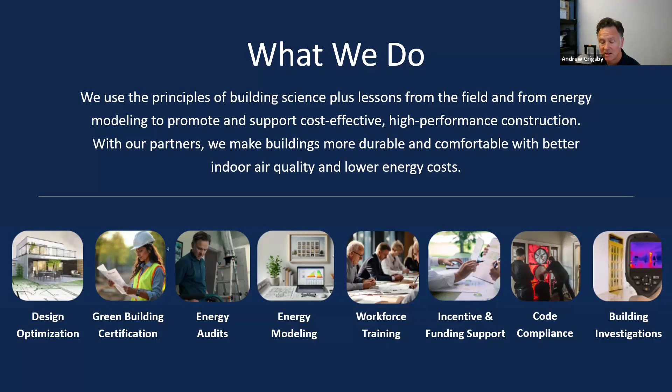To me, it's just about building better housing that costs less to operate, that's more comfortable, that's more durable, that manages moisture, has better indoor air quality. So that's really what all this is about for us.

This content has been developed really as a partnership with lots of y'all in the room, building code officials, some partners at DHCD, and grant funding that originally was funneled through SEEA, an organization down in Georgia, and originally it was Federal Department of Energy funding. So we appreciate that, and we're glad for that support so that we can do these sorts of trainings.

So we're going to jump into an overview of what we've picked out as sort of the most notable energy code changes. And again, this is residential. We're in an hour's time. This is going to be quick, and we're just hitting the residential energy code changes. We're going to follow that with sort of a quick look at how the code overlaps a little bit with some of the incentives that are available for building more energy efficient homes. And again, we'll end up with your questions.

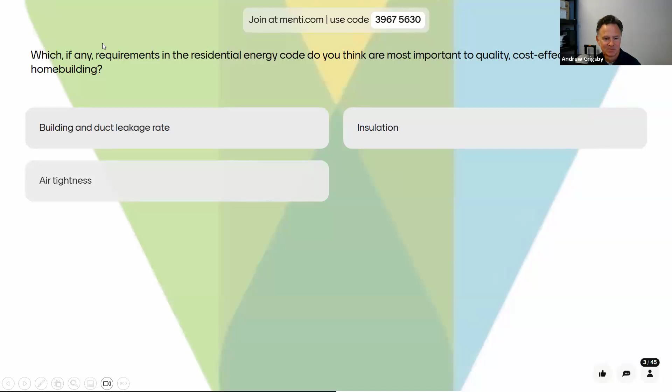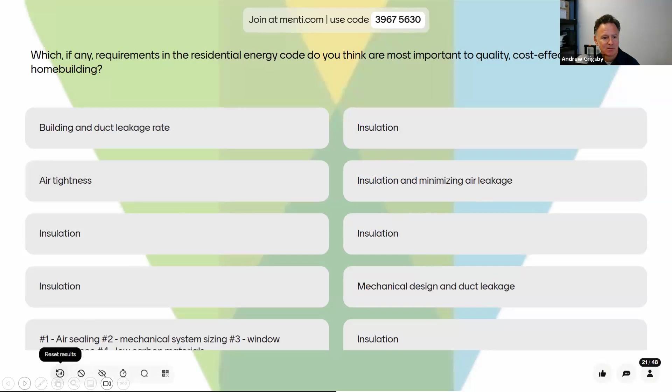Okay, insulation's making a strong showing here. It's sort of the basics, what people think. Ooh. Okay, people calling out air sealing, mechanical system sizing. That's a good one. Window performance, leakage rates for, I guess, the whole home, and for duct leakage, air tightness. All right, these are great responses. Thank you. I'm going to move on here.

All right, so jumping into the meat of the presentation. First, a slide I often start most anything related to home energy use with: where does the energy go? Because to me, it's just sort of a grounding in what's relevant. And this is data from the U.S. Department of Energy's pretty exhaustive study in 2020, and it's for Virginia. Often I show a national average, and I'm happy to have Virginia data here. It's not very granular, as you can see. Other is a big bucket, and a big chunk of that is appliances, plug loads. So many of the devices we're plugging in these days.

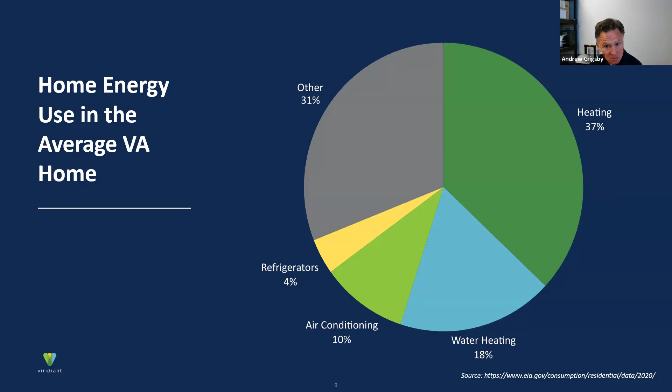But still, the biggest one is heating. That's where most of our energy goes. And if you add heating at 37% to air conditioning at 10%, heating and cooling count for just under half of all the energy use in our homes. And in as much as the energy code speaks primarily to heating and cooling costs by way of air sealing, insulation, duct sealing, mechanical performance, this is really getting to at least half of folks' home energy bills. So this matters to people. This is what's important to us, because we think we're out there to really reduce the cost of housing, and we think energy efficiency is a real pathway to that.

All right, so what's changed with the 2021 code? Well, to me, one of the big things is that Virginia is no longer all 4A climate zone. We now have 3 climate zones, and we'll go through that. One of the issues related to that is the R60 attic insulation that's now required in zones 4A and 5A for some flat attic floors. Slab insulation, for years it's been 2 feet in length, and now it's 4 feet, and that to me is a significant change. There's a new requirement about maintaining loose fill attic insulation at the edges of walls inside attics. I've got a picture to explain where that shows up. The details on floor insulation, number 5 there. Nothing's fundamentally changed, but there's some helpful specificity in the code about how to ensure performance.

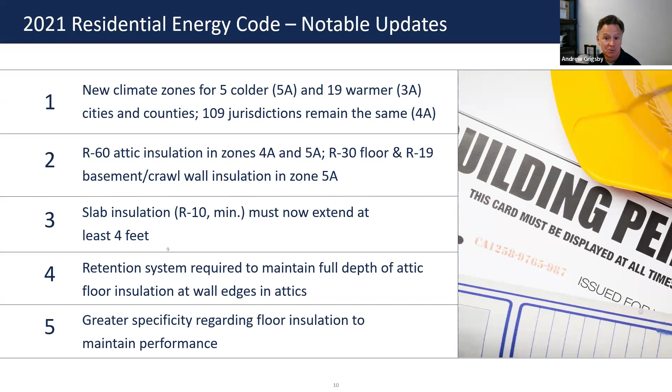We've got more requirements for insulation and air sealing. I mean, it's all basic stuff, but there's a big table in the energy code that calls out where you must air seal, and that table continues to expand. Duct leakage, this is kind of big. All duct systems will have to be tested, and even those that are fully within conditioned space will have to be tested, and they can't leak more than 8%. Ducts outside of conditioned space remain at 4% maximum leakage.

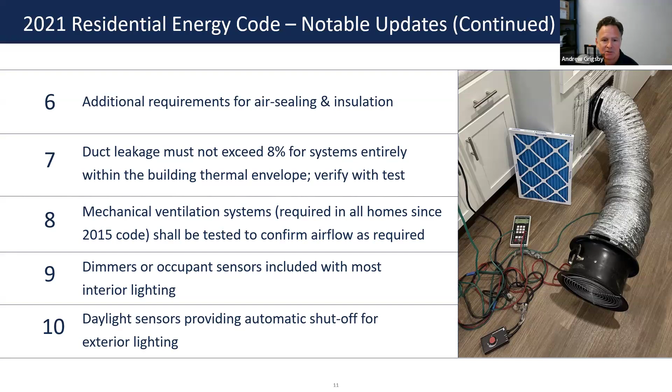Number 8, mechanical ventilation. The whole home mechanical ventilation system, you'll have to test it to see how much air actually moves through that system. We can't just put it in and assume it's moving enough air to provide the required amount of fresh air for the folks. So that's a change. 9 and 10 both speak to lighting and including sensors on both interior and exterior lighting.

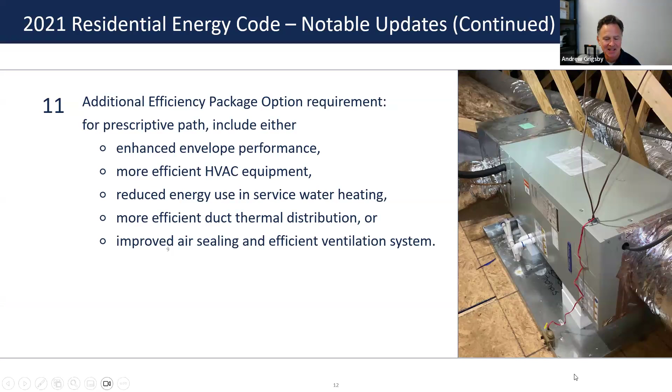And finally, number 11 here, it's a bit of an oddball. If you're following the prescriptive path, and the requirements for performance pathways as well, but for most folks who use the prescriptive path, you have to do everything that's required, and then you have to do one more thing. You get to choose between these 5 here. So it's kind of a strange option in the code to my thinking, but we'll try and unpack it, and I'll be interested in your thoughts on it as well. All right, so that's a quick overview. Now we're going to talk about these in depth.

Climate zones. So these climate zones, just so folks know, they come from ASHRAE, the American Society of Heating, Refrigeration, and Air Conditioning Engineers, and they track weather in every county in the country very closely because they are being relied upon by heating and cooling contractors to give them the right data for set points and for sizing equipment and for understanding the heating and cooling load of buildings. So they're just trying to produce accurate data about the weather that's actually happening.

And so what we see is there is a lot more of the state that is now in that 3A zone that used to be just all below us in North Carolina. Really from Danville to Williamsburg and Virginia Beach, that whole southern tier there is going to be a warmer climate zone. And then up in Bath, Alleghany, and Highland counties, the three green ones in the inset there, and the cities of, I think, Covington and Clifton Forge. Those are the 5 jurisdictions that will now be this 5A cool, humid climate zone.

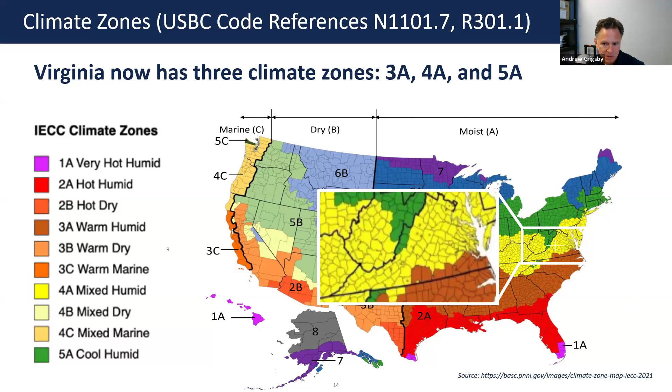And what that does is, if you're familiar with this table from the Energy Code, in your jurisdiction or for local officials, you can just look in one spot. For builders, architects, etc., you'll have to double check a little bit if you're building in a new place. If it's Norfolk versus Richmond, those are now 2 different climate zones.

What we see as far as changes over here on the left side, that column, the window U factors, and again, U factor is just the mathematical inverse of R value, so it's thermal performance. Those go down to get greater thermal performance. It's still a double pane window that corresponds to a little better than R3. So those are all a little better across the climate zones.

And here's the one that people are talking about, that R60, which, as many folks know, in the 2024 model code has gone back down to 49. This tracks what's in the 2021 model code, the IECC, for these climate zones, and that changes again, but downward, which is unusual in the new edition, the 2024 edition of the model code.

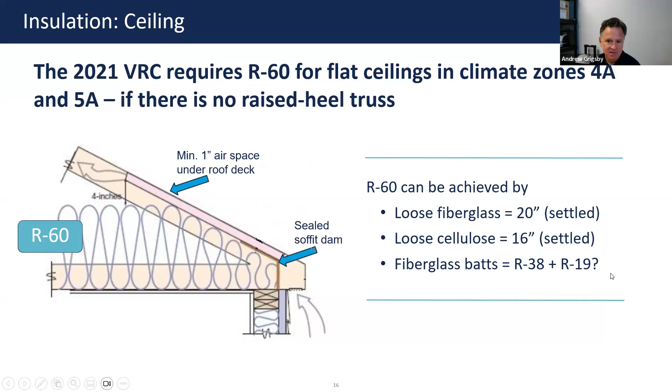So a bit on that R60. That applies when you're insulating a ceiling, when you have probably a vented attic, and you have your rafter or truss design such that there's not room for the full height of the insulation out to the outer edge of the top plate of the wall below. If that is the case, then R60 is what is required over the main field. There are a variety of ways to do that. Fiberglass, cellulose, but this is the current requirement.

If you're using a raised heel truss, an energy truss that allows for R49, around 12 inches height here at the outer edge of the top plate, then it's still R49 for zones 5A and 4A, and down in those 3A climate zone jurisdictions, it'll be R38. So again, it depends. We've got a lot of the state now that says 3A climate zone, big population centers in Hampton Roads, and all the way across the line with North Carolina over to Danville. So just know where you're building.

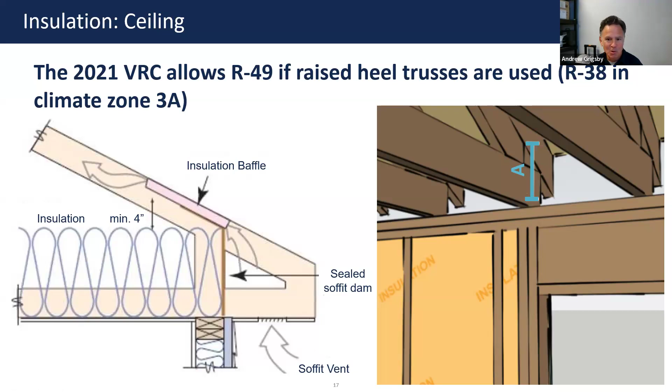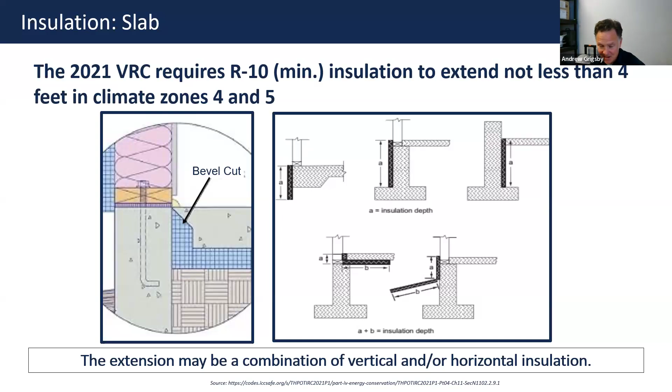We had an in-person version of this training here in our office yesterday, and we allowed more time for that. So there was lots of discussion about this one too, as well as that R60. Just slab insulation in general, the conditions when people don't want to do it, how much energy flows through solid concrete, and how much you want to insulate slabs as much as possible. But the nuts and bolts of providing that 4 feet in the field is going to be something that designers have to factor in, and then inspectors have to look for.

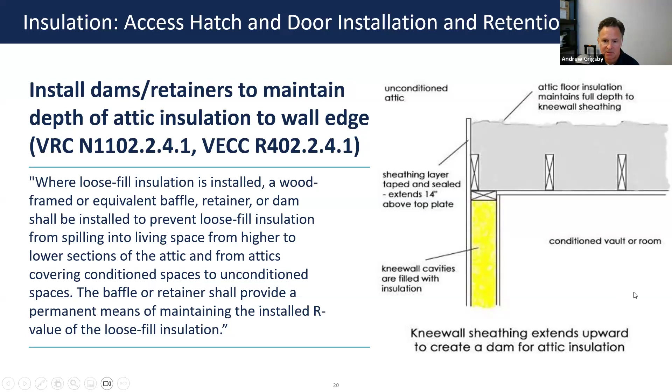All right. I'm really missing the discussion here. I wish we could talk about this stuff, but I'm flying through the slides. Then we'll have time to talk about these.

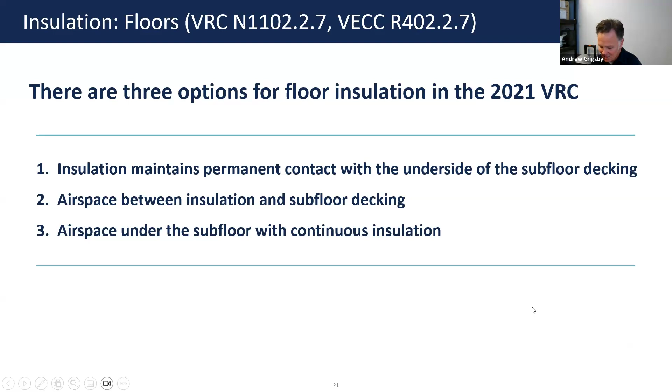All right, floor insulation. As I read it, well, maybe things have... I'm sure there's people on this call who could tell me the particular details that changed, but I think the spirit of it hasn't changed much. But there are these 3 options detailed in the code. Option number 1 speaks, to my mind, to how most floors are insulated. And here we're talking about maybe the floor over a vented crawl space, the floor over a garage where you have finished space above a garage, or maybe the floor of some sort of cantilever or bump out.

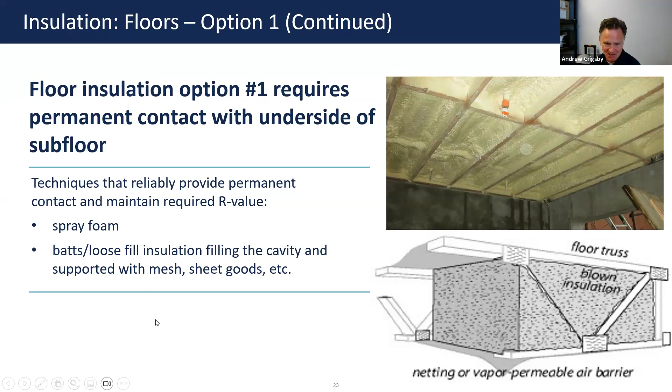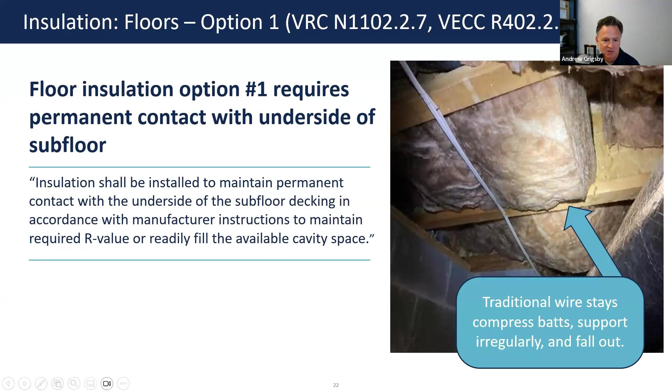Again, we had a lot of discussion about this yesterday, but that basic language, permanent contact, in accordance with manufacturer instructions, that's not new. That's the way it's been. I'm just taking the opportunity to call out what I think is a defect in what is a very conventional application for floor insulation. So that was option 1.

Option 2 specifically allows an airspace, but in order to do so, you have to essentially make that cavity airtight. You have to have the proper R value of the insulation that's below the airspace and in contact with some sort of solid barrier below. And then the other key detail is that at the perimeter where those air cavities abut a band board, a rim joist, those joists will have to be sealed to make sure these cavities will be airtight. If we're going to leave that airspace in there, we're going to make sure there's no air movement through it. And here, the entire required R value is cavity insulation.

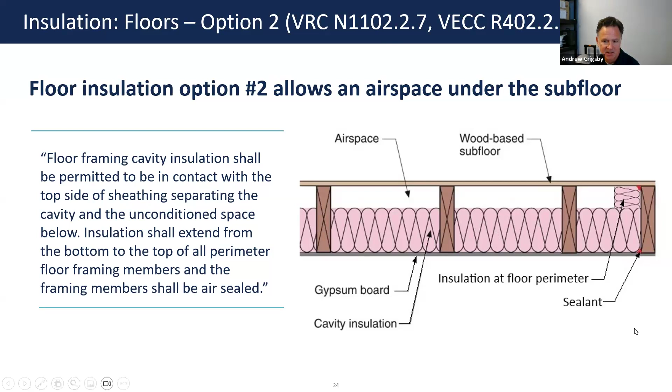All right, moving on to air sealing. And here there's this table in 1102.4.1.1 in the VRC. A lot of it's pretty common sense stuff to my mind. And as a builder, you'll want to air seal as much as possible anyway, because you know you've got to pass the blower door test. I just called out a few things in parentheses there. There's just a few new details that I thought worth calling out.

In particular, even as I read it, even with a vented crawl, one will have to air seal the butt joints of the rim board and seal the rim board to the sill plate. I think a lot of folks are very used to gluing down subfloors, so that sealant on top of the rim joist is not going to be new for most people. But then also sealing butt joints, such as shown here in this corner, between the rim joist members, and also sealing the sill plate to the rim joist, that's probably going to be new.

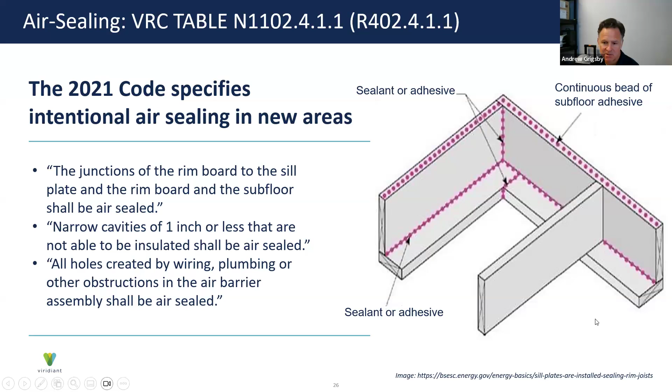And in this drawing, they also show sealing the butt joint in the sill plates, which I didn't see as required in the code, but if you're there, you might as well. And what this does is it reduces air movement through that layer of the building that is encompassed by those floor joists and rim joists. So again, there's a lot of new text in that table that's called out both where and how and why you'll have to air seal. So it's worth taking a look at.

Here's a slide which we had a lot of discussion about yesterday, and it made me dig deeper on it just this morning. And turns out it's not new text at all. I thought it was interesting, so I included it in the slideshow earlier. But that is the same text going back to the 2015 Energy Conservation Code. We had a lot of conversation about this last fall at the VBCOA conference, where some folks in the room responded to it as I did, like it was new, but it is old.

The main language here is the language from the code in parentheses. And what I take from that is you want to make the building substantially airtight at the sheathing layer. And to me, that's just good building science. We want to keep outside air out of those cavities that typically are insulated. So it's good building science.

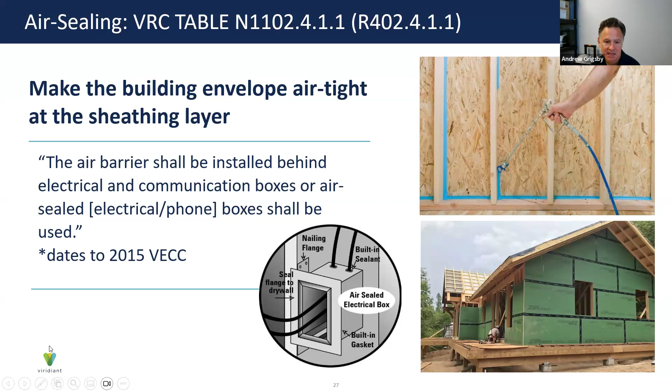And indeed, the conversation at the VBCOA annual convention last fall was about the cost of these air sealed electrical boxes, which are $6, $7, $8 a piece. No one wanted to put those in. So the solution is to do what's smart and make the envelope as airtight as possible at the sheathing layer. Variety of ways to do that: tape, foaming or sealing on the inside. But again, this is not new. It goes back to the 2015 code.

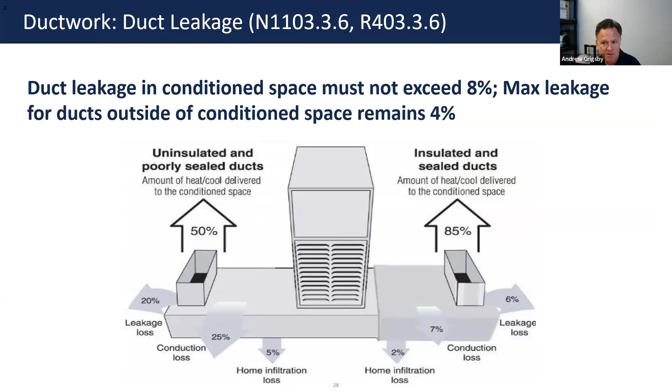Moving on to duct leakage. And here, this is new. Any ductwork that's in conditioned space: previously, if it was all in conditioned space, you didn't have to test the ductwork. Now you do, and it may not exceed 8% leakage. For folks who are really in the weeds on this, that is total leakage, not leakage to outside. So 8% total leakage for ducts that are in conditioned space. For ductwork outside, it stays the same, 4% is still the maximum.

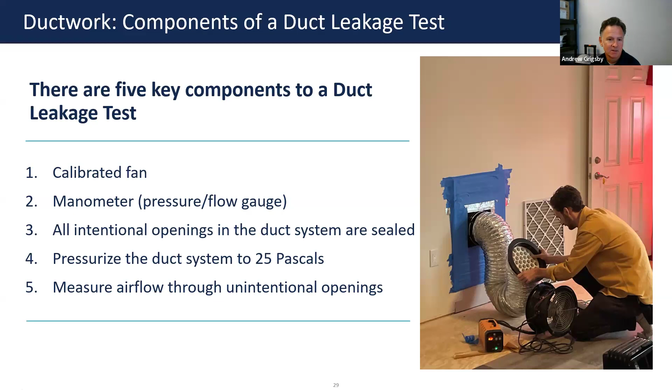If you're not familiar with the duct test, it's a pretty simple thing. We seal off the duct system, we seal over all the registers, and then we pressurize the system and measure the excess air going through it. Doesn't take long. We get really critical data about the performance of the building.

And a point to why this is so critical. These data are from the so-called field study that Viridiant participated in. We were the contractor for Virginia for this effort that took place across many southern states and was extended to other states, where it was meant to be an investigation of not just what code is on the books, but how homes are actually showing up on the market. So at random, best we could, we went out across the Commonwealth to try to get to homes that were presumed meeting code and ready for occupancy.

And what we found, even after that first incidence of Virginia requiring ducts to be tested. Now, prior to this, going back to the 2012 code, and I think even the 09, there was a maximum leakage rate for ducts that were outside of conditioned space, but we didn't require actual testing of them. We allowed visual inspection to confirm leakage rate. Well, once we actually required a test and then went out to see how compliance was doing, results were pretty bad. We found that most homes, even when they were presented as being ready and code compliant, most of them were not. Some of them were failing at 20, 30, the worst one we found was over 40% leakage.

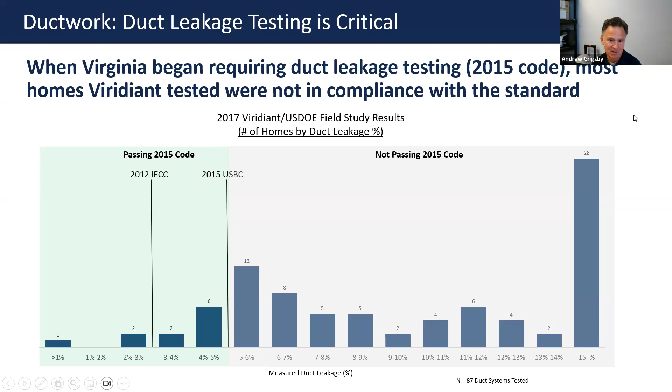All right, moving on to a different kind of duct, the duct that is connected to your whole home ventilation system. And here's a slide showing a version of the problem: when exhaust ducting is long and twisted and maybe stepped on or damaged or something else is sitting on it, it's real hard for air to move through it.

And our mechanical ventilation systems, which have been required in Virginia homes since the 2015 code, are required because we're building homes to be more airtight. And as we do to improve cost effectiveness and efficiency, we get to a threshold where we also have to have a mechanical ventilation system. And on balance, this is cost effective for residents. But we have to make sure that those ventilation systems are performing, that they are moving the amount of air that code stipulates. So that volume of air is unchanged. We're still using the same table that is based on bedrooms and square footage, and we're still using the same formula as an alternative to that table.

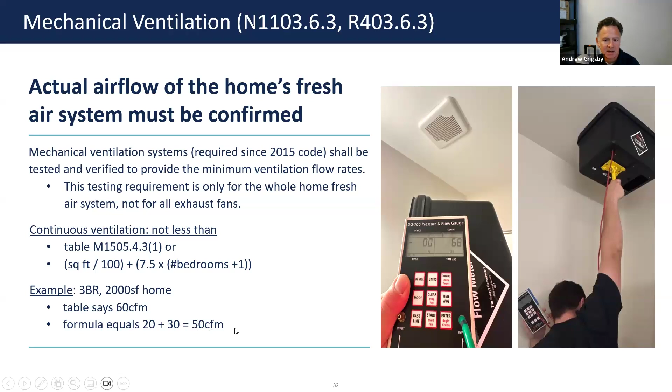Real quickly on ventilation, there are a variety of code compliant ways to meet the ventilation requirement. One is via exhaust fans. Going back one slide here, say we have this home where the table says 60, the formula says 50; maybe they opt for the lower number. You can use either one of these as you choose. So we have to move not fewer than 50 cubic feet per minute continuous exhaust from that home. So we can do it by having a fan that exhausts 50 CFMs continuously.

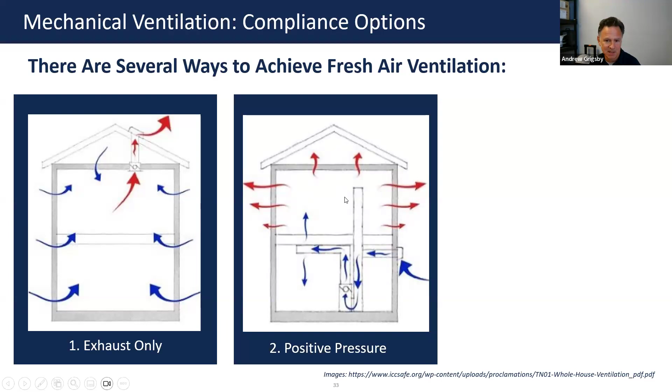We have a so-called positive pressure system, where we're basically inflating the home and driving that air out through random leaks and cracks. And finally, we have balanced, where we are using fans to both bring air in and exhaust the same amount of air. So we're not intentionally driving outside air through the building envelope, or inside air to the exterior. This is preferred for lots of reasons, but the equipment to make it happen is more expensive.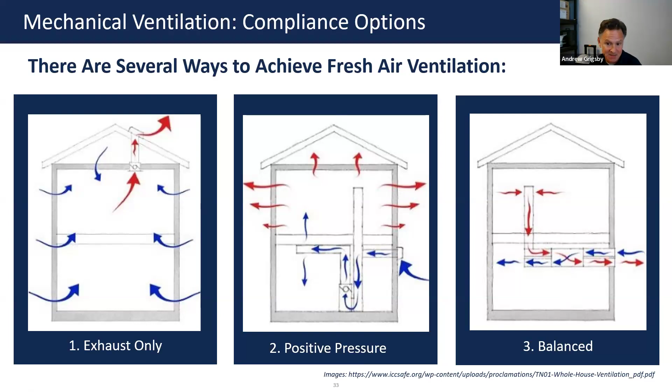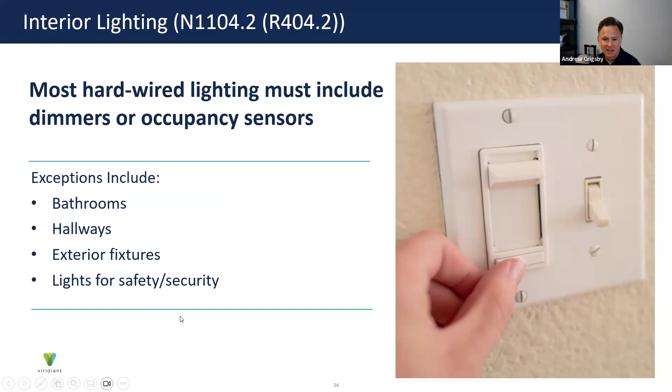All right, we're up to number 9 here, 9 out of 11. A lot more dimmers and occupancy sensors are going to be required in all homes. There are some exceptions listed there, but a lot more rheostats coming your way. Similarly, on exterior lighting, if it's more than 30 watts, some sort of controller to ensure it's not going when it doesn't need to go. And so we can basically save folks a little bit on their electric bill.

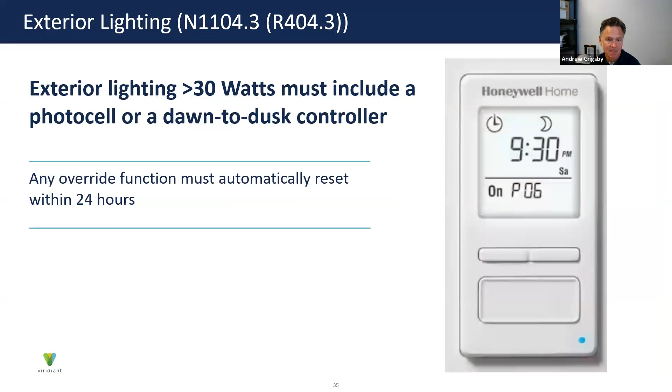All right, last but not least, the additional energy efficiency requirement. So here I'm talking about the prescriptive path of compliance with the energy code. The next slide will cover the so-called performance pathways for the energy code, and they're different, but they relate to each other. And again, everything I've talked about thus far has been with that prescriptive path, where there are minimum R values, where we're not using an energy model to calculate whole building energy efficiency.

So for the prescriptive path, we've done all those things we've talked about. We've got the R60 if necessary. We've tested the ductwork even in conditioned space. You do all that, then you have the option to choose among one of these other 5 measures to further increase the energy efficiency of the home.

Now, I would encourage a builder, a designer, to plan ahead for this. You could get to the end of your project having totally forgotten about it, and you can't change where the ducts are, you can't change the insulation. You could just throw in a more efficient heat pump. You could just throw in a more efficient water heater. Those are options. A great option, I think, is to just design this away by including all your ductwork in a conditioned space. Right there, you've met this requirement.

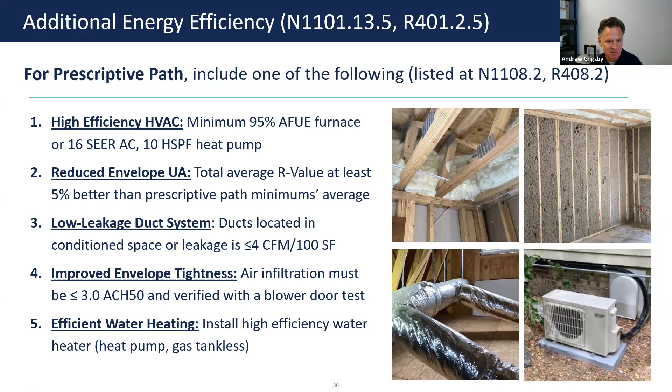In Virginia, if you use 2x6 walls, or included perhaps insulated sheathing and the R15 batts in the walls, you could reduce your envelope average U-value. That'd be a way to do that. Relying on option number 4 here, just counting on achieving not more than 3 air changes per hour at the end of the process, strikes me as a risky pathway, but it's an option for some folks. If you're used to building a super airtight house and you know you can do it, then go for it. But again, choose from one of these 5 in addition to all the basics you've already met. That's how to apply this to the prescriptive pathway.

If you're using the building performance path, you have to, and I'm frustrated with how this is worded, you have to score 5% better than your reference design, meaning they have set a standard and you're supposed to do 5% better than that. Kind of odd to me. Why didn't they just set the standard where they wanted it? But at any rate, this is how the text reads.

But you still also have to then choose one of those measures we just went over on the previous slide, but you don't include that in your modeled proposed design. So you model the home as you're not going to build it. You have to do better than the target that's listed, and then you have to do one more thing. Unnecessarily confusing in my mind, but I hope I explained that well enough.

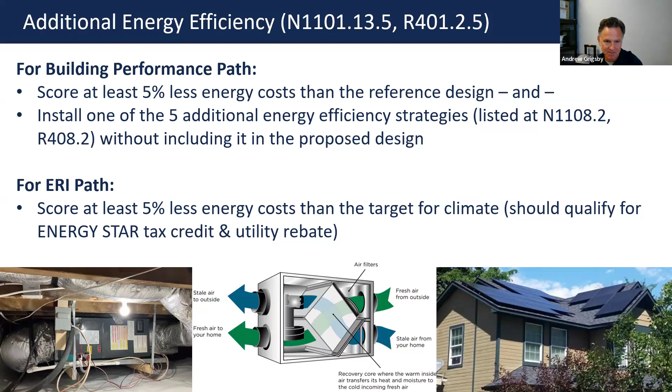For the ERI, Energy Rating Index pathway, here all you have to do is perform 5% better than the listed target. You don't have to also then add in one of those additional efficiency measures. So clear as mud.

Real quickly, and this is primarily for the architects and builders out there, and maybe the trades, there are some incentives out there here in Virginia, and in particular, if you're in Dominion's electric service territory, to build to the Energy Star standard, which is pretty achievable, as the next slide will show. You can get a meaningful amount, about $4,000 to build Energy Star.

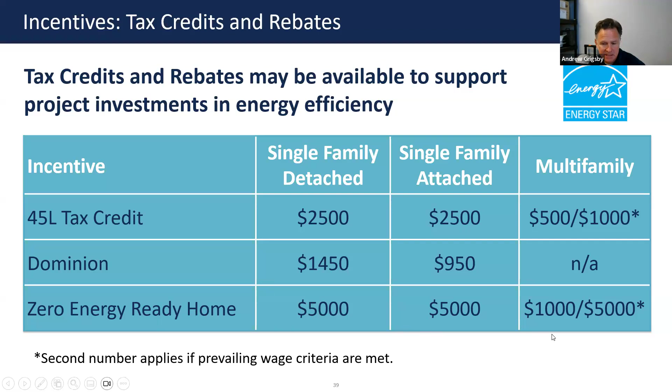Zero Energy Ready Home, that's a more stringent standard. And there, if you did that, you would also get the Energy Star. So if you're in this zone, you could get that 5,000 and the 1,450. So meaningful money designed to encourage builders to take that step up.

And here's just a slide to show that so many of the requirements in our code right now really don't go beyond what's in Energy Star. All the testing, reviewing of the manuals J, S, and D, really the only thing that our code doesn't require, on this list anyway, is that energy model.

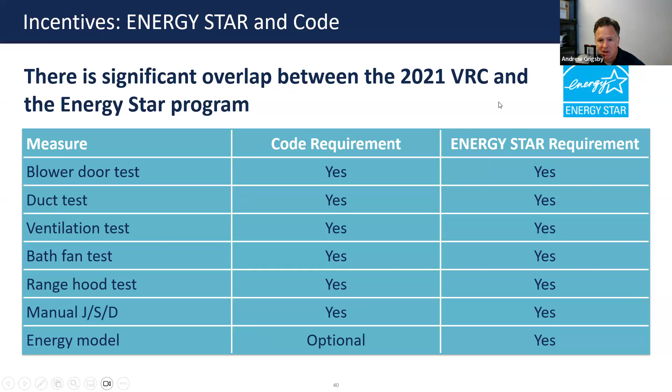But energy modeling could be a pathway to code compliance if you're using the building performance or the ERI pathway, the so-called performance pathways. So just something to keep in mind. If you're building a pretty good home, and even if you're already doing energy modeling, you might be closer than you think to meeting Energy Star.

All right, real quick, one more slide here. Which new requirement among the ones we just went over, or maybe you have another one in your mind, you've already done a lot of homework on this, which one do you think is going to be most difficult to ensure compliance with going forward? Be curious about your thoughts on that.

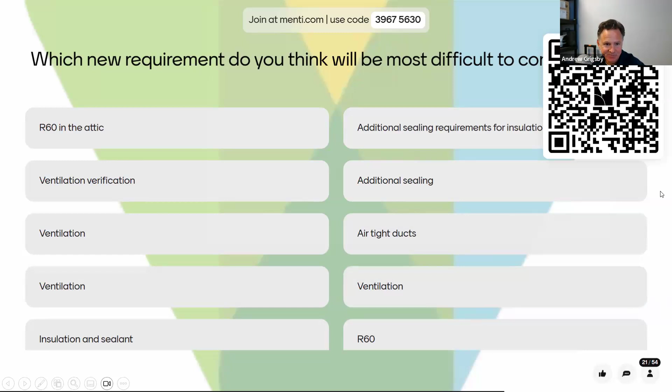But this is very interesting. And I'm thinking of how it might relate to sort of who's in the room, code officials thinking about ventilation and thinking about what's actually out there. We've talked to a couple of builders about the R60 attic insulation and how, because of some of their particular designs, it's going to be a real headache. All right, very interesting. Thanks for sharing your thoughts.

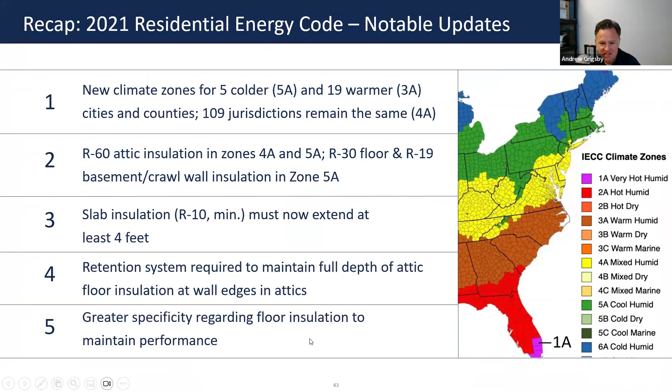All right, quick recap here. New climate zones, R60 attic insulation, 4 feet of slab insulation, those retention walls or retention systems for loose fill attic insulation over some sort of vaulted room. We've got the specificity for floor insulation, and you got Andrew's editorial on that and the wire stays.

Number 6, additional requirements for air sealing, which a lot of people indicated they think that's going to be a challenge. Now the blower door test requirement has not changed. We're still at 5 air changes per hour. So just FYI. Duct leakage, testing systems entirely within conditioned space, now not to exceed 8%. Confirming airflow in those mechanical ventilation systems.

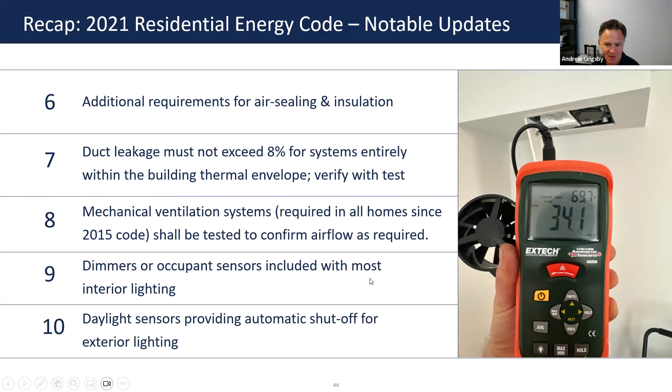Yeah, I agree. They're going to have to be present in operation and performing as designed. That may be one of those steps, one or more may be a challenge in some cases. We've got our lighting requirements, and finally that additional measure that people have to do on the end.

All right. If I said one more last time, I lied. Based on what we've seen here or sort of other issues on your mind, be real curious to hear what other topics, in this vein, energy related, performance related, what do you think you or folks in the trade need more opportunity to learn about?

We're interested in that. We have a lot of materials we want to share. We want to encourage conversation around the state about this stuff, about duct testing, about ventilation systems, and the pros and cons of exhaust versus supply versus balanced. So if you have some ideas, maybe it's something we just covered. Maybe it's ventilation. I think ventilation is one that we can learn more about.

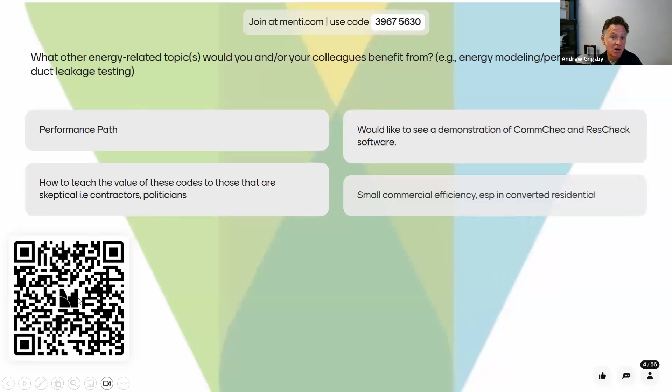Okay, so the performance pathways, that's a good one. Using energy modeling to demonstrate code compliance, which is really ComCheck and ResCheck. Those are basically performance pathways, averaging out R values, etc. Let's see if I can move this.

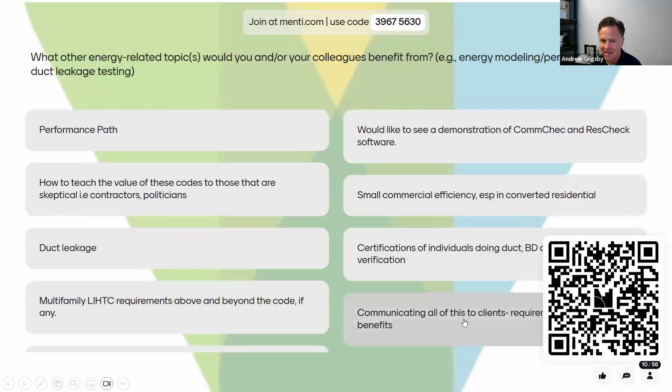Communicating this to clients. I like that one. We talked a lot about that yesterday, and just sort of what people are willing to pay for. An important point is that the code sort of sets the floor. The code is the minimum. The code is what any new home buyer can reasonably expect their home to deliver to them, whether they put a lot of thought into R values or SEER values or ventilation, this is the minimum. People are welcome to do more, but Virginia code says there shouldn't be less. So that's an interesting one.

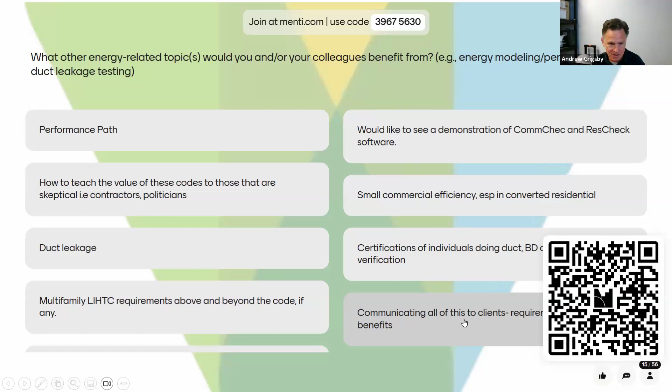Certifications of individuals doing the duct testing. Now the code is not very specific on that, but in my mind, it's a bit of an issue. And maybe it's something to address in the upcoming code change cycle, which apparently is going to be getting underway in June. All right, these are great ideas. Really appreciate you sharing that with us.

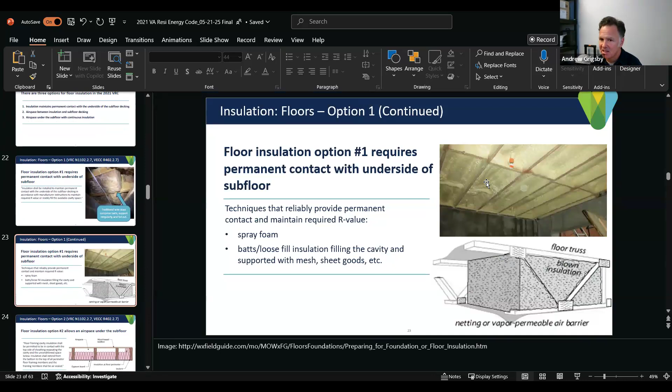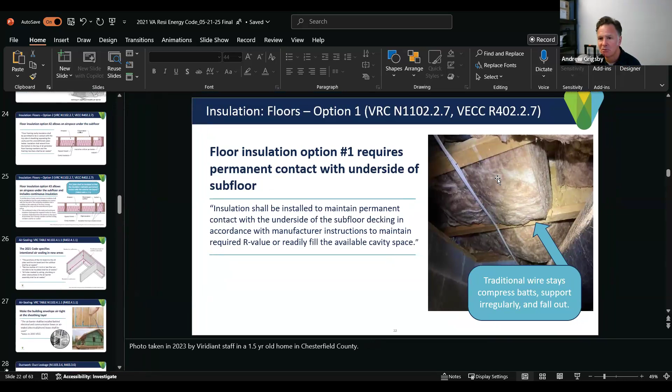So Jackie was asking, and again, I think it's back on the floor insulation slides, potentially option 1. Looking at the foam isn't covering the joists, and shouldn't it cover the joists? Let me see if I got any here. It's not required by code. That would be an example where it's just cavity insulation. Indeed, in the conventional method of putting batts up between the TJIs or the joists, you have that thermal bridging of the joist, but when code says R19 in the floor, that is cavity only. It's a good idea certainly to cover the joists and eliminate that thermal bridging. That's what this solution here would do, where you have that continuous insulation, but again, not required by code.

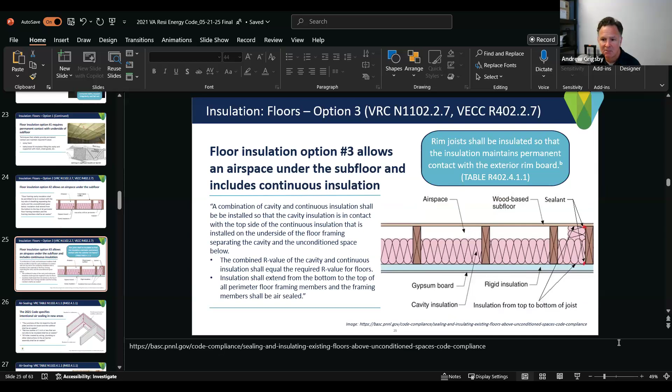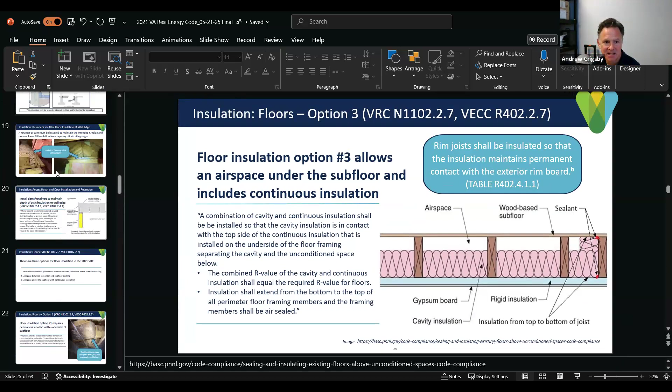We just got a question. How about reflective insulation on walls and floors? Reflective insulation. Oh, good topic. I'm going to go to an image of an attic here, which is where I'm used to seeing it, where the so-called radiant barriers you sometimes see.

Radiant barriers are a great tool in the right climate. Where I mostly see radiant barriers are up in the roof system, and they're designed to minimize radiant heat transfer into the attic space and keep your attic cooler. It's a great tool. It's not appropriate for our climate. We're in climate zone 3. We're in a heating dominated climate.

I met the guy who invented that. Peter Pfeiffer, he's an architect in Austin. He stuck aluminum foil to a piece of plywood and said, hey, let's use this for decking and keep some of the heat out of our attics. And yeah, it makes sense in Austin, in Phoenix, in Jacksonville.

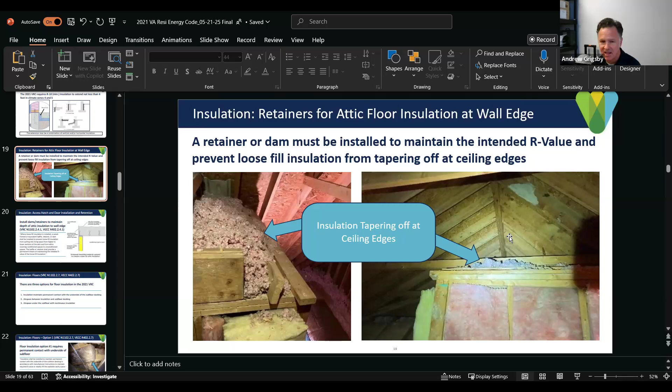But here in Virginia, think of a cold January day where it's 40 degrees but bright sunshine. We want our attics to warm up, because when that attic hits 80 degrees, you stop losing heat to it. And that's a good thing. And as you saw from the very first slide, we put way more energy into heating than we do cooling. So, there might be other places you could put it, but we're not in a climate zone where reflective barriers are appropriate in attics.

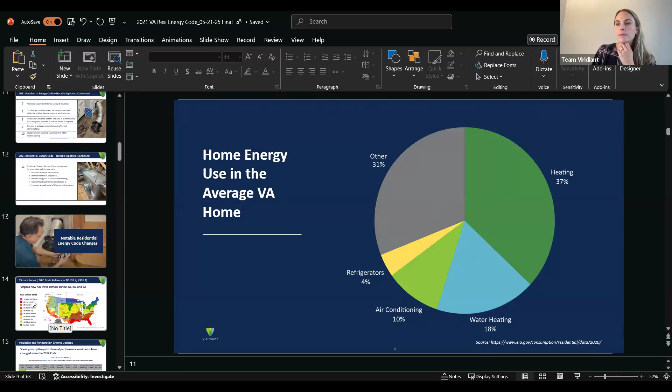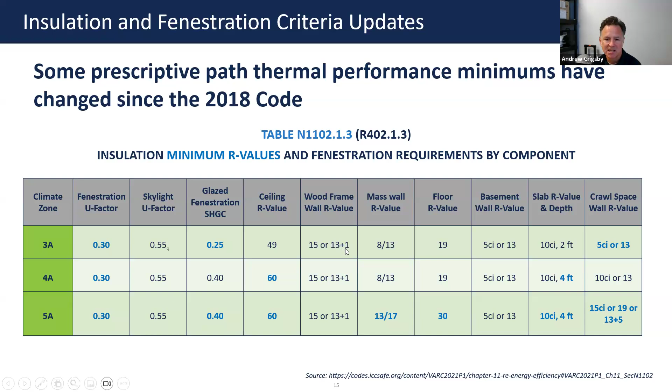Now there's structural insulated sheathing. There's a variety of sheathing products that have a layer of insulation built into them. But that +1 is meant to be the continuous layer of insulation. If this is an R5 and this is an R13, you'd call this 13 + 5, for example. If this is just R1, this would be 13 + 1. So that's what that means.

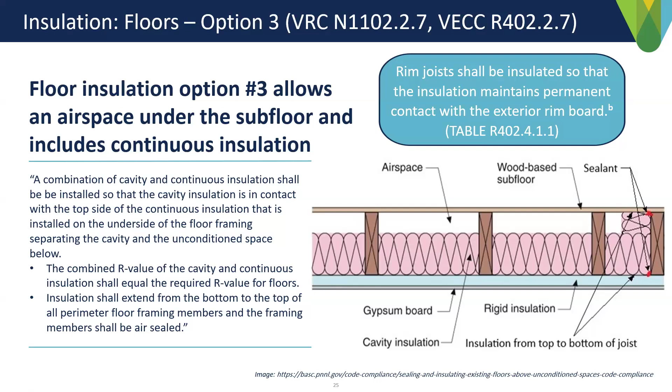So Mike from Southface asked that question and just raised his hand. So Mike, I'm gonna ask you to unmute yourself, and then you should be able to ask that question. Thanks so much, and great presentation. That clarified my question to an extent, that you're basically saying you have to do something slightly additive to an R13 assembly. Why only R1? And my other follow-up is, are most builders just doing the 15 in the cavity?

Yeah, Mike, thanks for joining. So this is an anomaly of Virginia. You're down in the Atlanta area, right? Yes. So this was our compromise in the 2012 code cycle, when the model code for our region went from R13 to R20. And what we ended up with was the 15, which in my experience is what is mostly done. Those are the high density fiberglass batts that qualify as R15 in a 2x4 wall. But you still have the option of doing an R13 batt and putting on that 1/4-inch fanfold.

Somewhere in the assembly. Yeah, exactly. I was worried that maybe the +1 was gaming it somehow and trying to get credit for something. So it's additional to the sheathing and the drywall. Exactly. Fantastic. Thanks. That was a great presentation. Thanks. Appreciate it.

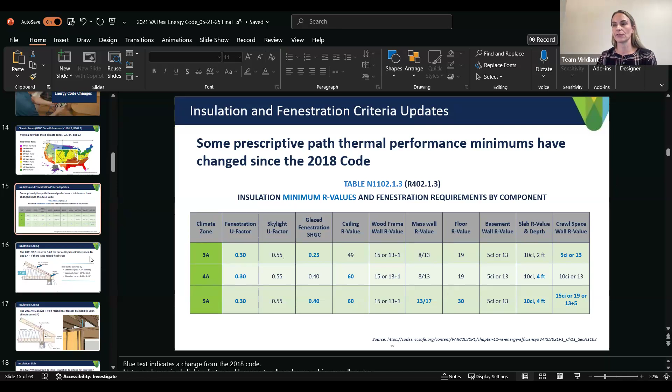Awesome. We got a couple questions from Wade. He's asking about the blown insulation dam. Is that something the framer would install, or the insulator? And he also asked about the blower door testing, and if there's a small footprint testing stipulation there. Oh, great question.

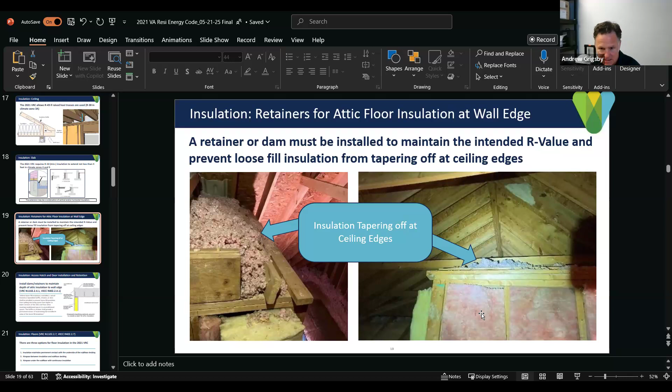So job one is to provide the exterior air barrier for this cavity insulation. I mean, this home was built in the aughts, so it doesn't have it. And often I'll see Tyvek and they'll say that it can be installed to be airtight. But Tyvek wouldn't provide a rigid barrier or dam up here.

So to my mind, it's a strong argument for including a sealed airtight rigid air barrier. It creates the dam up here. And then as a bonus, just keep running it down and fully encapsulate the cavity insulation for the wall below. But the basic of your question, who does this? Well, that's for the builder to figure out.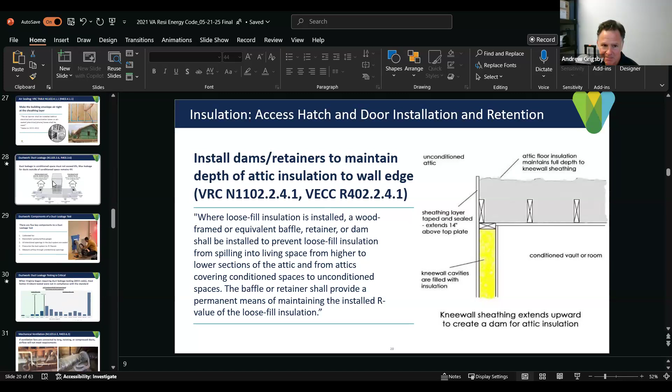And then the question, I guess it probably relates most to the duct leakage test. Is there some sort of leniency for homes that are smaller? The idea being 4%. This is 4 CFM per 100 square feet of conditioned floor area. You might have the same size air handler in a home that's 2,500 square feet as a home that's 1,500 square feet. And so, yes, there'll be more length of duct work, but you get a lot of leakage just out of the air handler and the plenum, which might not be meaningfully changed between those two homes of very different sizes.

And no, there is no leniency in the Virginia code. Now, if I'm talking to someone who works in other states, where they use the model code or a different variation on the model code as applied to that state, it'll be different. The model code does allow a different duct leakage number for smaller homes. I think it's 1,000 square feet.

It might be 1,500. And on the blower door score, on the whole home air leakage, same thing in the model code. The 2021 and the 2024 allow some leniency for smaller homes because that measurement is a function of size, and it's much harder to get a very small home down to that air changes per hour number. But in the Virginia code, no, one number across all home sizes.

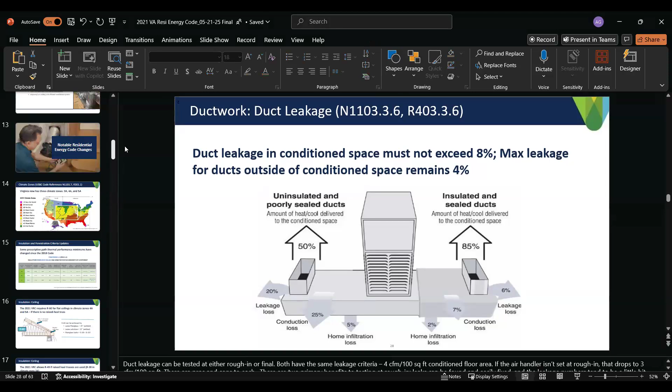Hi, this is Bruce Cornwall. As far as the insulation value of sheathing and stuff, unless it's been tested by the Federal Trade Commission under their standards and given an R value, then it doesn't have an R value. So it could have a U value, but it won't have an R value. So sheathing and things like that can't be counted to have any value there.

Thank you, Bruce. Bruce knows more about all this than I do, so glad you're here, and thanks for chiming in. You're welcome, Andrew. Okay, Stuart, I still don't see what you've messaged me. Okay, sorry, let's see.

No, you're good. Okay, so now we're talking about air sealing requirements in a crawl. If it's a vented crawl, could the additional air sealing along the rim joist exacerbate any moisture problems? Oh, great question. No, because that's the insulation layer. And that's where we want the insulation to be performing and not be compromised by air moving through it. We want to avoid that area being a place where moisture can either enter into the building or escape from the building.

That opens up a whole can of worms about what the venting does and when it does different things, and the problems with vented crawl spaces in general. But no, this won't. And I guess the point being, are we relying on those cracks as an exit point for moisture from the crawl space?

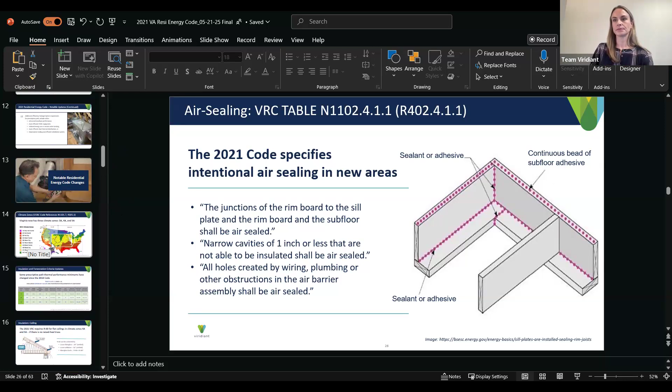There's a question about the 2024 Zone 4 wall insulation, what Virginia is going to be, whether it's 20 and 5, 13 and 10, 0 and 20. Yeah, well, we don't know what it will be. The code update process is beginning now, as noted. We'll have months and months of debate over that. We'll have votes by the Board of Housing and Community Development.

We shall see. If you know the answer to that, you've got a crystal ball. So yeah, it remains to be seen. I know there's a lot of people who are dead set against changing anything on that. So we don't know. It'll be up to the process.

What I can tell you is that, again, the model code went well above this back in 2012, and it's been creeping up ever since, such that if I were building a new home in this climate zone and meeting the code minimum, I would probably be using 2x6 walls with cavity insulation with R5 sheathing. And that would be code compliant to the model code for climate zone 4A.

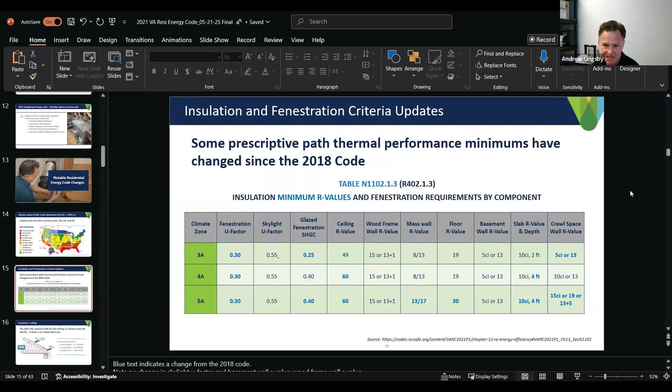But I might even put in more wall insulation because I think it's cost effective over the long term. But we don't know what's going to happen in Virginia over the coming months. But come join the conversation. It'll be a lively conversation, always is.